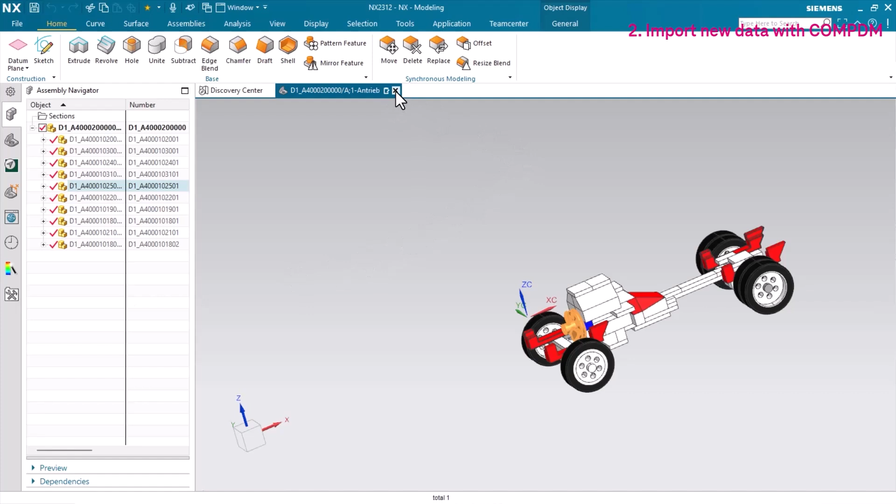Okay, so now regarding the data exchange, we imported the data correctly into Teamcenter as new data. But now we want to export the data. We want to send it to a supplier, to a partner company. That's why we now switch to our next agenda point, exporting the data we have in Teamcenter.

So let's switch back to COMPDM, export data with COMPDM. Yes, and now select the ID.

So I can just search for D1. We imported it with the prepend. Let's find the root one. Here it is. And now I want another prepend for the export, for the file names.

For example, I want to say it's for my partner company XY, and I'm going to rename the files in that way. I could also put some additional attributes like the item ID in the file names, but for the demonstration I think it's enough for changing the file name.

Here in the next view we see the file name is back with the prepend. And now the interesting thing is to export it without destroying the structure, right?

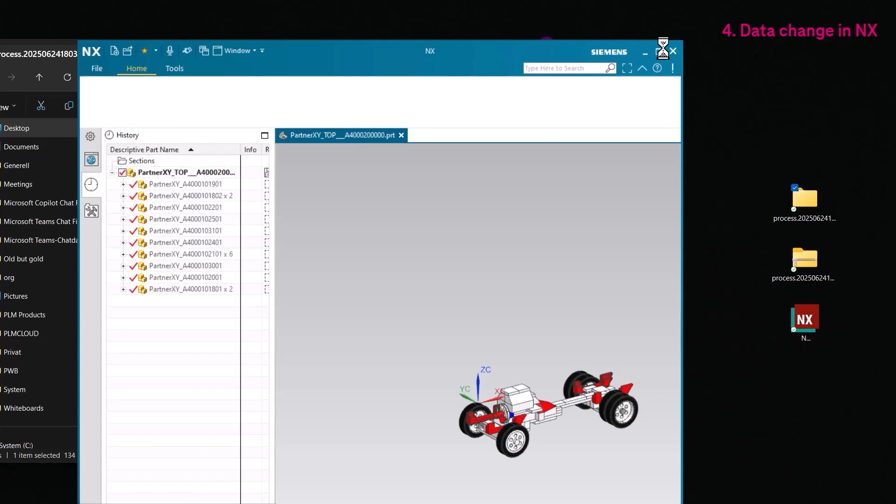So here we, on the left, we see all the structure without any broken links, with the partner XY in front. This is what we wanted to make clear on disk. This is for the partner company.

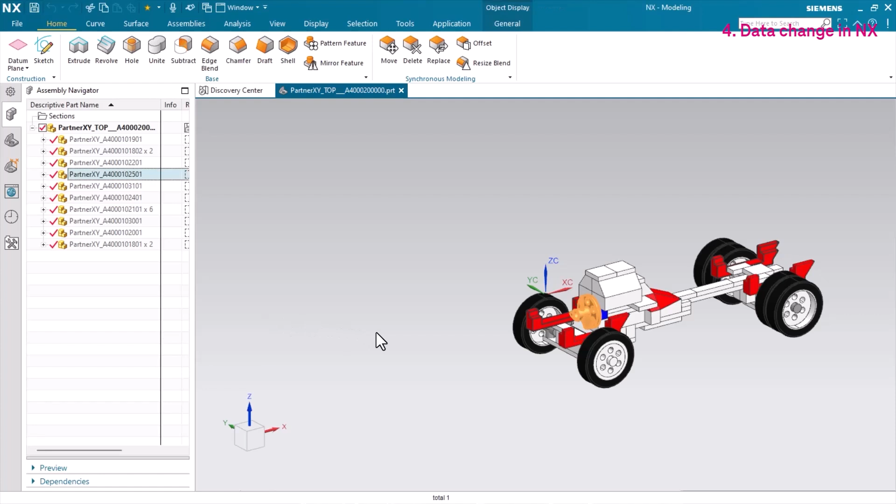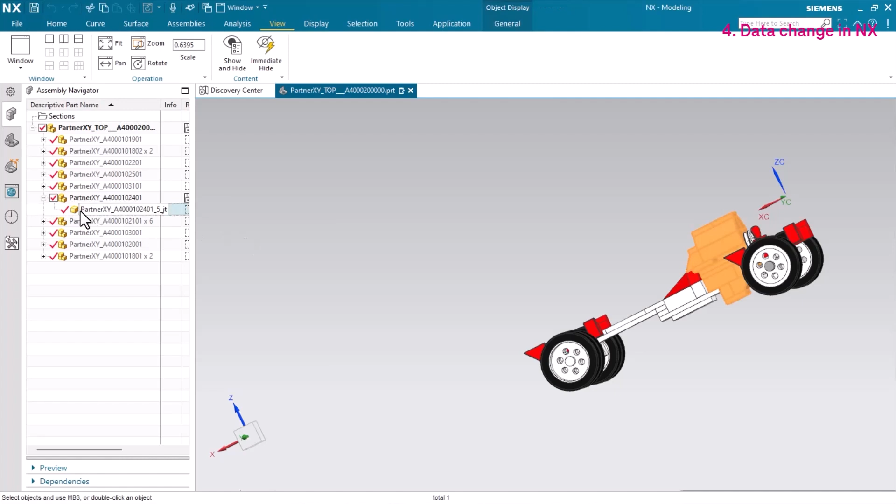So which part can we change? I think I'm gonna just select one, here this, for example. Okay, I'm going to open it in a new window. Here it is. And change, for example, the color, to COMPDM orange, for example.

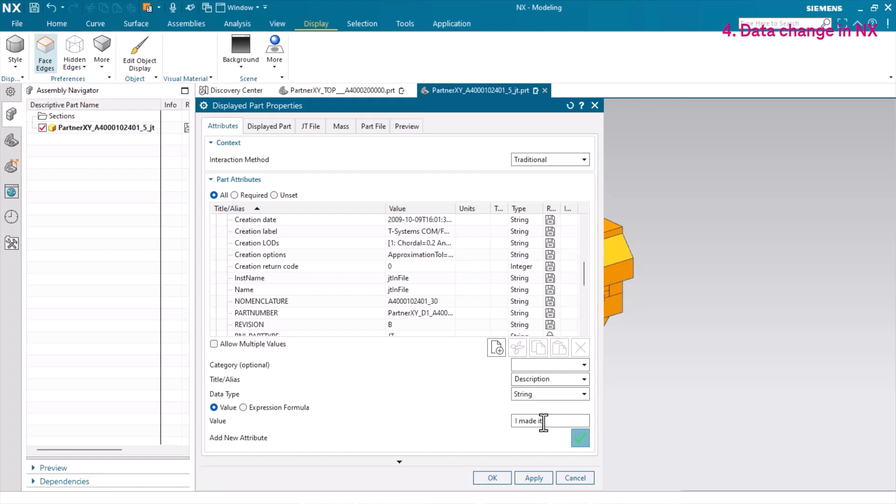And maybe also change some properties. For example, we say it's a new revision. And now we want also a description of our change. Description. It's orange now. We save it.

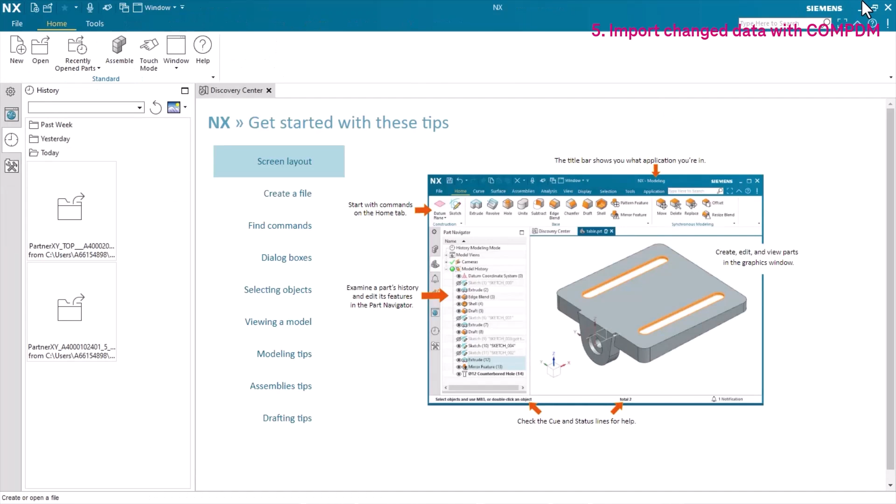Okay, now we will get the package back to our company and we want to import it again in Teamcenter. We don't know which parts changed, but COMPDM will detect this for us.

So we have, we have here the files. And now I go to import again. Select the root file.

Select with renaming. So I don't want the partner XY in front, I want to remove it. Here is the same, this is pre-configured. We don't want any prepend this time.

So now COMPDM checks the data, renames the data, and imports it in Teamcenter. We have now three NX tabs, so the second one is after the renaming, and the third tab is how it will look in Teamcenter.

COMPDM already detected we have a new revision here, and in NX we have also the description. I made it orange. Yes, in the Teamcenter tab it's highlighted because COMPDM checked what is the current state in Teamcenter, and it knows revision A, and there's no description.

So let's confirm it. Write it. Let's wait a moment. On the right side we see also the information: incoming version is newer, and the dataset is a new one.

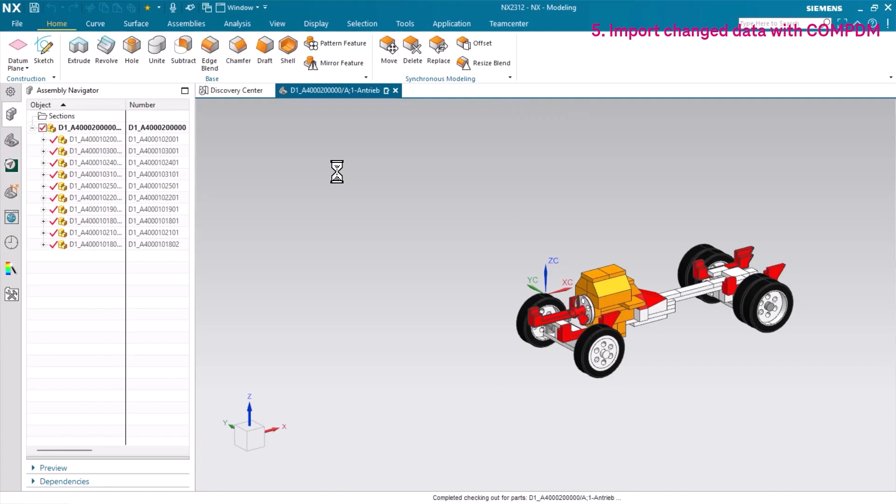While NX is loading, we see the structure here on the left, the new B revision. Okay, all links found again, and we have our orange part. Perfect. Exactly like we wanted it.